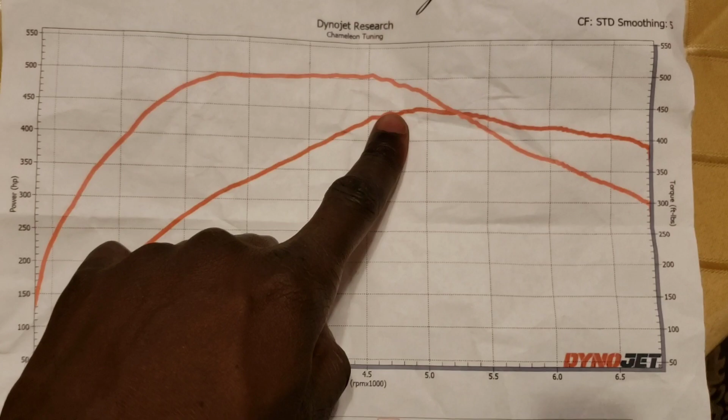Right, and this one's the wheel horsepower range. It's pretty much delivering the power as it should. As the RPMs are going up, the turbos are literally spooling. They shoot all the way up to about 450, right? And then right around there is where we have a cross.

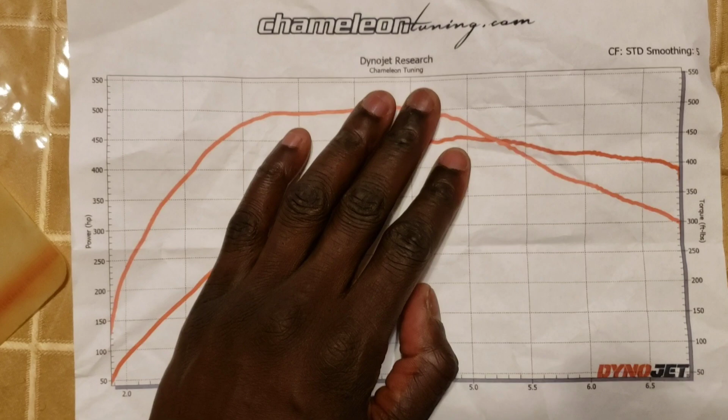But from what I remember reading, whenever these usually cross, it could be for different reasons. One, it could be a high compression motor. Usually when you have a high compression motor, you are more prone to detonation at higher RPM because the engine's just spinning a lot faster, especially on turbocharged cars.

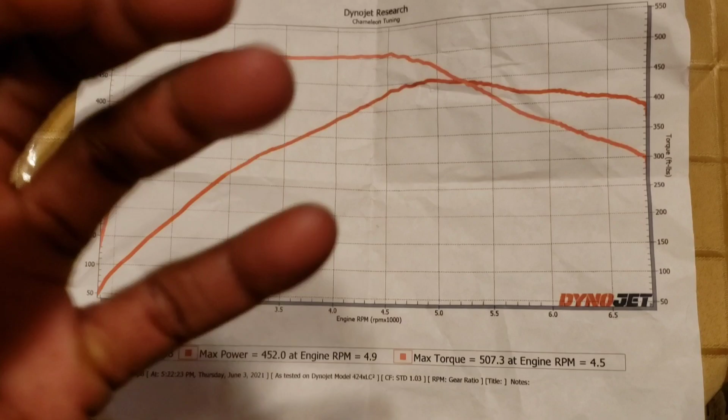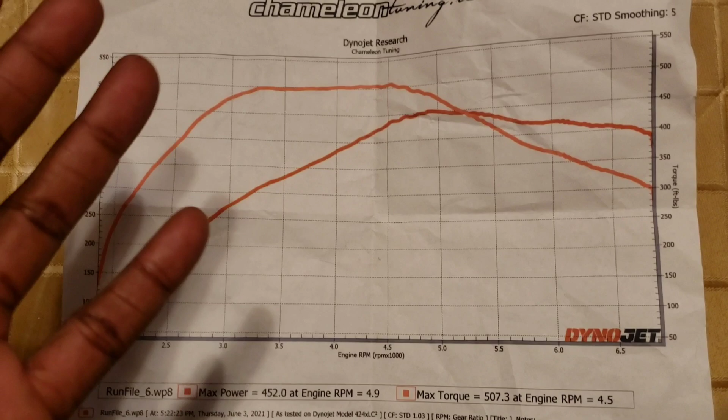Two, another reason why this could be crossing is because the turbos themselves are not delivering enough CFM. That's pretty much not enough air. Every time air is being allowed back into the combustion chamber, it's not delivering that much because the turbos literally just ran out of steam themselves. There's just not enough air being delivered, CFM.

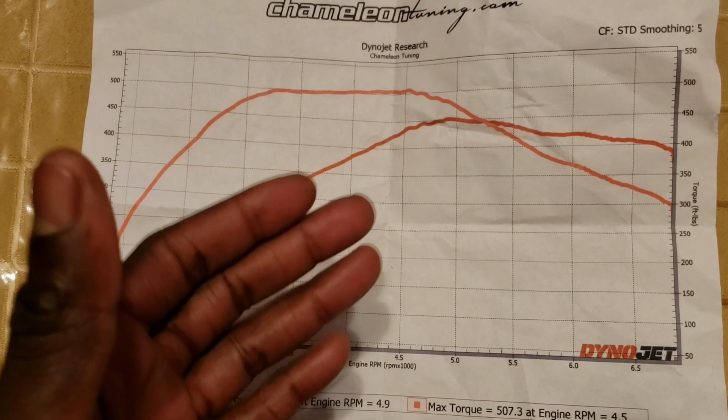Three, it could be up to the tuners themselves. They might have backed down the amount of PSI because they're trying to protect the drive line of the car. Maybe the transmission may not be able to handle that amount of torque at the higher RPM. Maybe they don't want to damage the motor, the rods, the bearings, because the motor's spinning a lot faster, so they don't want to cause any excessive damage. So they believe the drive line just might not be able to take it.

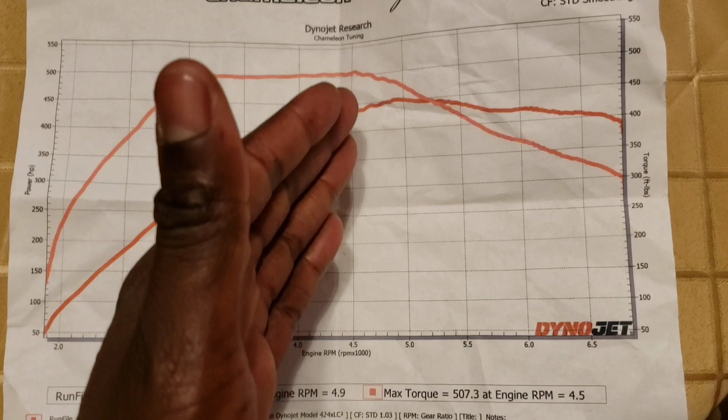And also, it could be because of fuel. Maybe the fuel doesn't have a high enough octane level, so once again they don't want any pre-detonation. But for whatever reason, this is pretty common in the VR30 community. So we come from about 500 pounds of torque all the way down to red line. Your car was probably going to shift right around here, right around that 325 territory. Jesus.

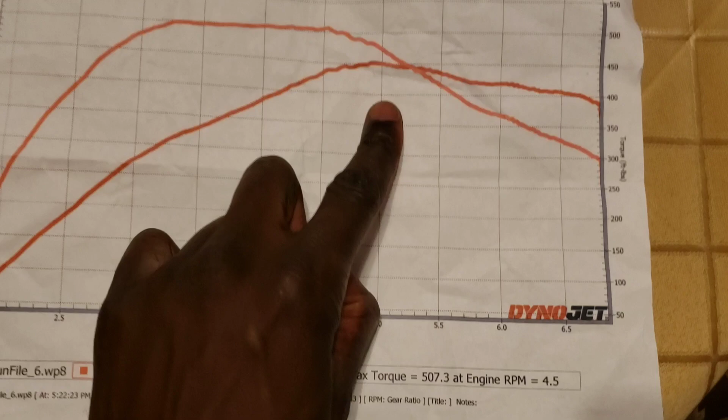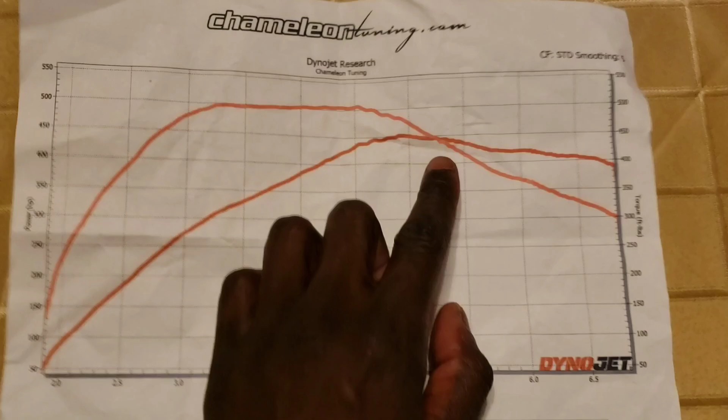That's almost, what is it, 175 foot-pounds of torque that we're losing to the wheels. It's insane, right? But also look at the wheel horsepower. We peak 450 right around that 5,055, 5,200 RPM, but then we come down around 6,500, right around a little bit above 400 wheel horsepower. Once again, we're going to be shifting gears somewhere around here, so understand we're not going that deep. But at the end of the day, we're still losing 50 wheel horsepower from 5,200 to almost 6,500.

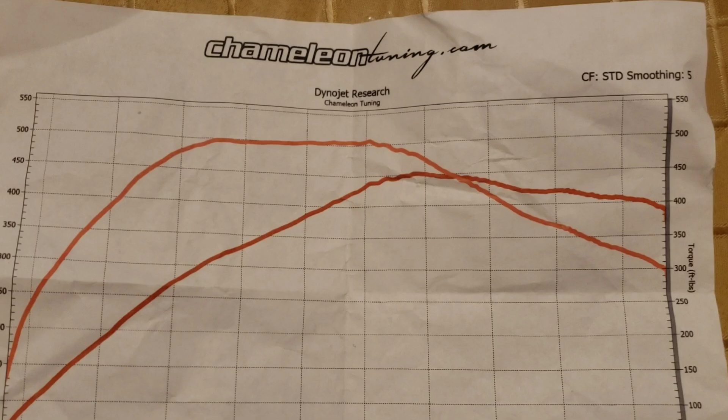Why is that? Why is that a bad thing? Because this is what will cause the difference of you winning a race and losing a race, right? So most of these high performance cars such as M3s, M4s, C63s, etc., these really modified cars, these imperial cars, they're designed to hold power to the highest RPM and keep the power in. They're designed to be able to take more of that type of abuse. They're plumbed better. They have better flowing turbos usually, and they just have a more developed engine and/or driveline, right?

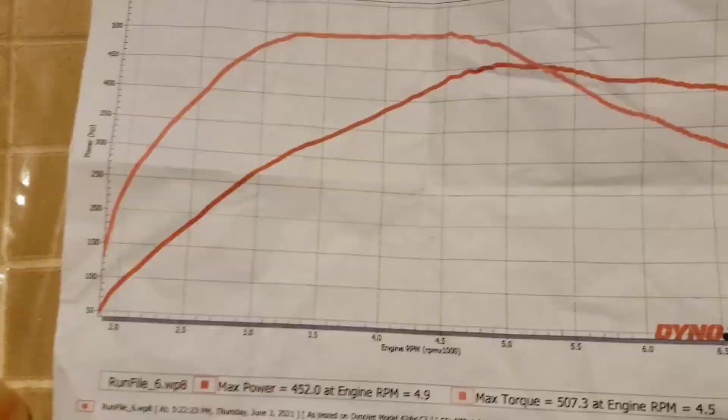So I can make 450. That looks like great numbers. That to the crank, I'm probably making like 525, 530 horsepower. But from then on, the engine is just not producing enough power. And if you're in any road racing situation, your road racing is going to be right around that 4,700 to about 6,700. Those 2,000 RPM are very crucial. So if I'm coming from 450 to 400, I'm going to lose 50 horsepower every time. This is how you guys might be able to lose.

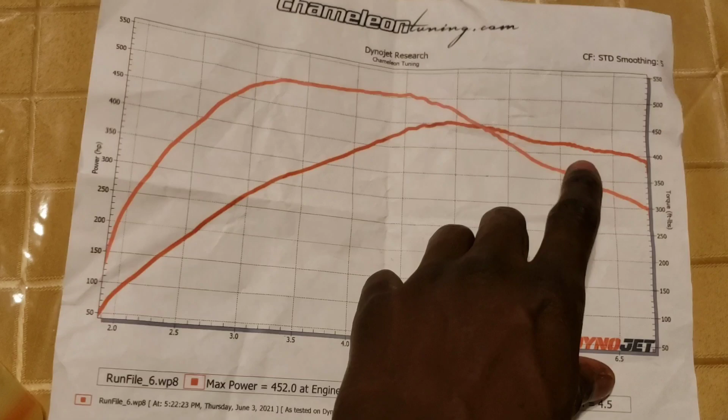You know, this is what's going to make it kind of hard to really beat some modded 392 6.4s, and/or those A10 Mustangs that are modded and tuned. A lot of them are gonna beat us just on this alone. So in the next video, I'm gonna talk about the different turbo options that you can go with, and hopefully I can get some pictures of their dyno sheets. But just know that there are ways to make this band a little bit better. You can go with E85 fuel.

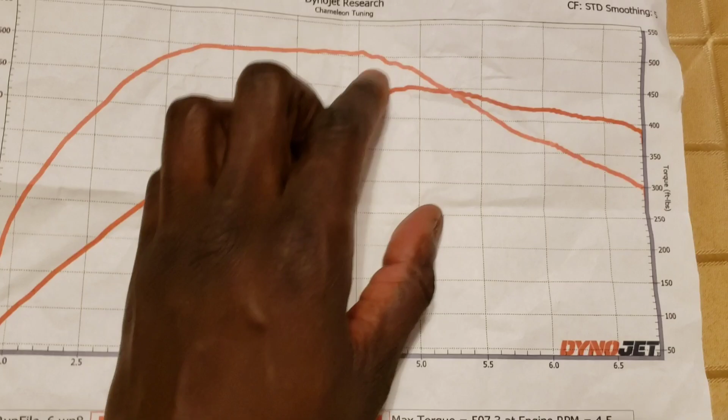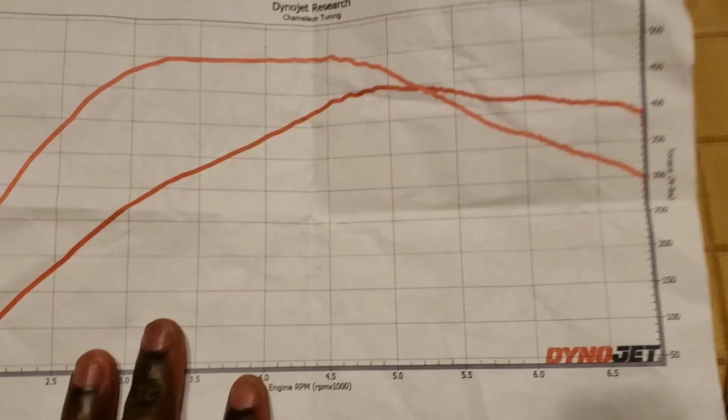Check on my channel. E85 fuel on these cars, usually E30, E50, E70, will push you up to that 500 wheel horsepower range. You'll literally just see this wheel horsepower curve go all the way up to like 500 and hold, and it'll back down a little bit to like 450 or 460. Once again, that means that you're gaining more power. There's more timing they can add into it.

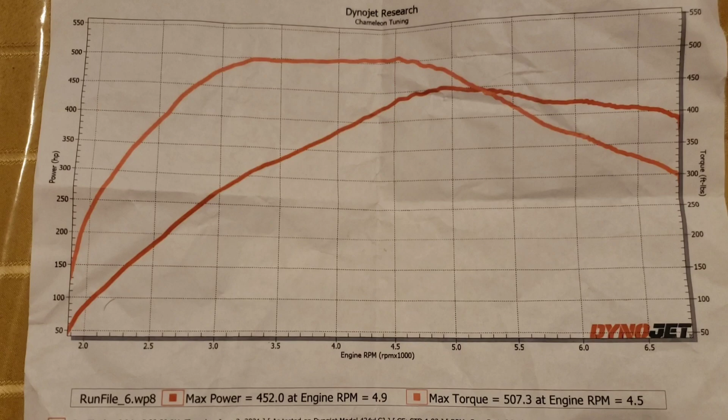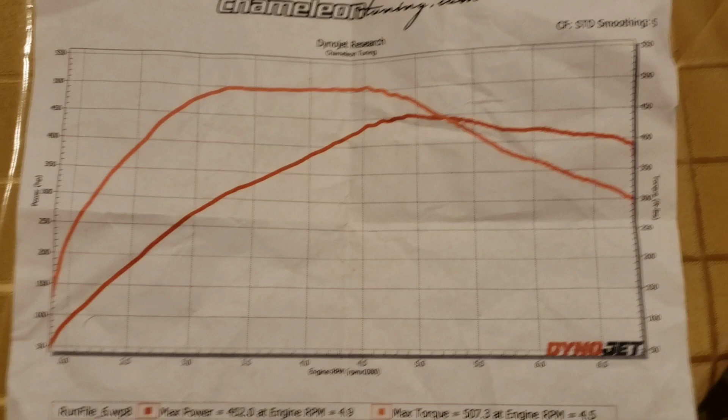E85 also does give a lot of a cooling effect, but then again that will come down to maybe the motors just have high compression, the turbos are still steaming out, stuff like that still really does exist. So we'll talk about it in the next video on the different turbo options that I would say would pretty much get rid of these issues. But anyways, outside of that, guys, this is my dyno sheet. I know you guys want to see it. Hopefully I give you guys some information about dyno sheets, a little bit more about the motor, transmission, etc. Just some information that's usually helpful for people that are new to the platform.